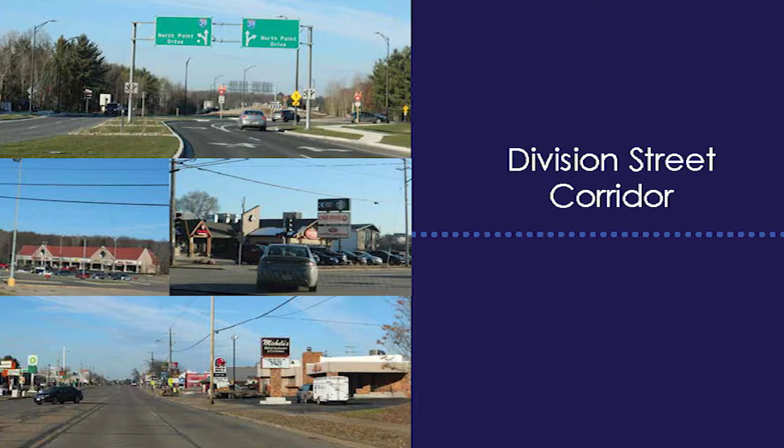So how do we bridge those big picture ideas and land them on Division Street? Well, first off, we listen. These are some of the comments that came out of the first public listening session, and that is: North Division Street should be where people are welcomed and come into the community.

It's a key gateway and it should supply opportunities for destination restaurants, hotels, housing, etc.

A lot of different people are looking for different things along this corridor. We heard many different proposals for specific uses, but the net effect is people are looking for different things in different formats, so we need to supply opportunities for those to occur within this corridor to be successful.

Biking and walking rose to the top in several comments as key aspects that are lacking in this corridor. Currently, we have a corridor that is very auto-oriented, moving traffic north-south very effectively, but it divides.

Division Street's a key name because it does divide east-west neighborhoods, the campus, the schools, Sentry, and other assets such as Schmeeckle Reserve from easy access to the community.

Big ideas -- again, these are comments we heard from the public input session -- include drawing the campus out onto Division. You'll see comments about that in some of the designs tonight. The idea that Division Street can be the front door for not just the community, but also the campus, is certainly not reflected in the format that's there today.

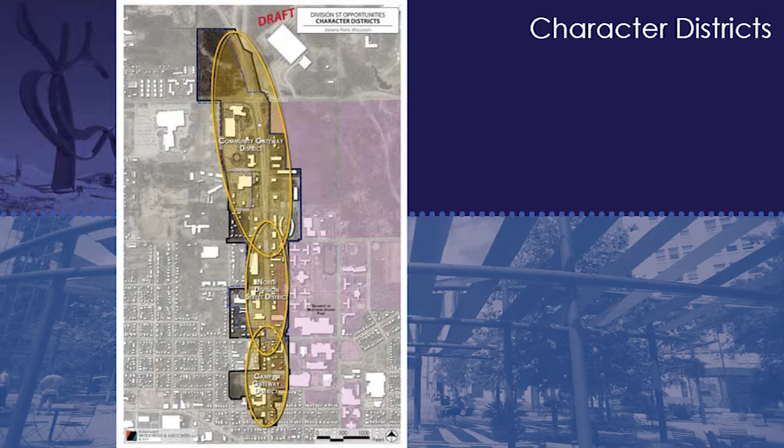Those three segments have led us to divide the corridor and make recommendations that respond to that, through the basis of the guiding principles of finding ways to diversify what Division Street is, opening up opportunities for additional housing and retail, while addressing vibrancy and community aspects that this gateway could be.

The first section is the community gateway, right as you get off the interstate and head to 4th. This corridor, as you reach the roundabout at North Point, is significantly different than it used to be. Think back to the days of the Holidome versus now the Sentry building flanking both sides of this intersection—it's a drastically different employment entry point than it used to be.

But as you continue south toward the existing development along this corridor before 4th, a lot hasn't changed. This is still largely an auto-oriented area, still a large cross-section, still dominated by large format uses. And honestly, some of that is okay.

Because in every community there is demand for those kinds of uses—hotels, larger format commercial and retail. So how do we find ways to make those aesthetically functional and improve the functionality and circulation of this area?

As we step down into this area, we see large areas of underutilized land, or land that can be redeveloped, repositioned, and reinvested in—and that spans both sides.

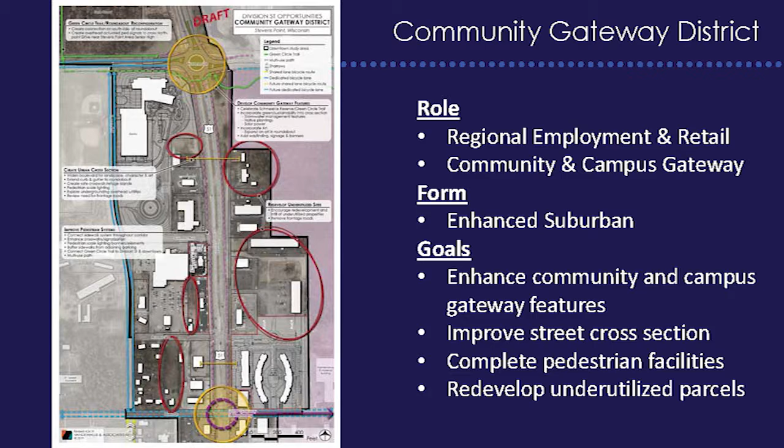But we also see assets that are beneficial. As I mentioned, Sentry, the presence of the Trig's grocery store, and some other commercial uses still form a functional piece of the community that needs a location. But we can certainly do better than a highway cross-section.

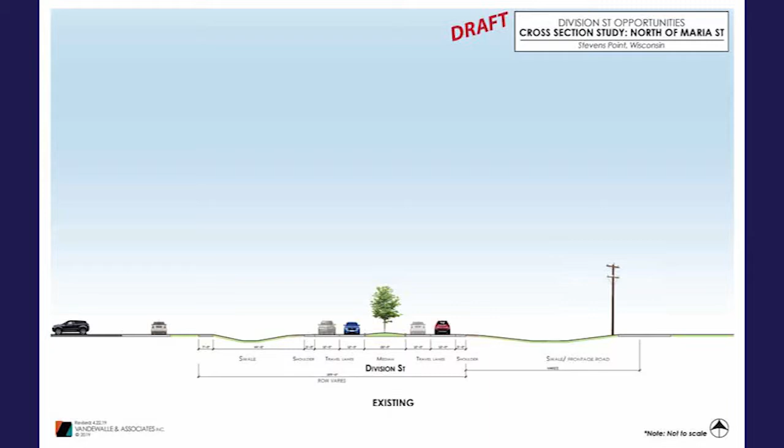In this corridor, our recommendation focuses on changing the feeling of having left one highway and gotten on another—rather, you've left a highway and entered a corridor that begins to approach the community.

This is not an area where we're recommending buildings come right up to the right-of-way or drastically change the environment the economy is supporting here. But we do recommend looking at this as an opportunity to recast this entry sequence.

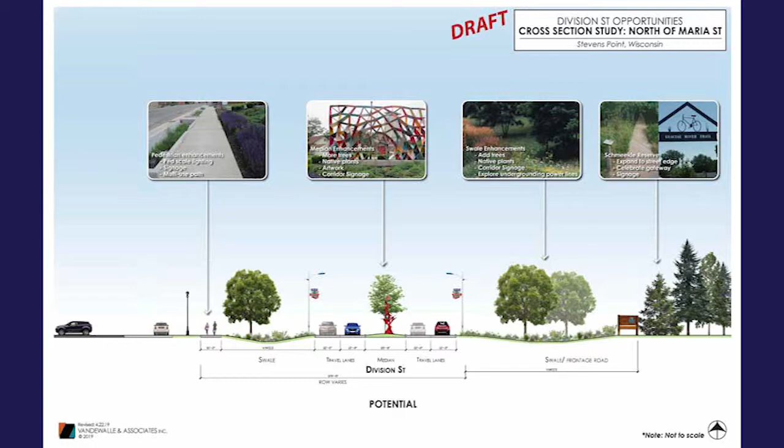As you come through this corridor, there are opportunities for art within new median landscapes, correcting the disjointed pedestrian environment by placing multi-use paths on the west and east sides, as well as enhancing community signage and gateway functions—so future development has a more aesthetic, connected, and functional approach than it does today.

This could take the form of renewed retail uses serving the region and beyond, or new employment uses like what's already begun with the Sentry improvements. But largely, we'd be looking at aesthetic improvements so we transition from that highway corridor and step down in travel speeds and character until we approach the next segment of this project.

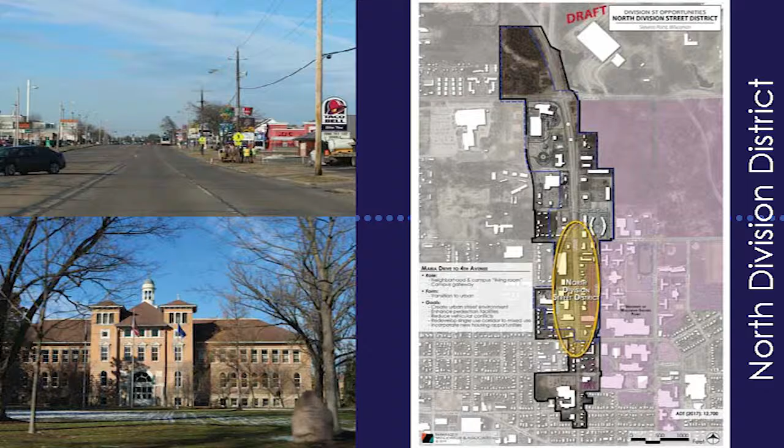As you approach Maria, significant changes to the corridor begin to occur. We've gone from areas largely underutilized and in need of reinvestment to areas with a lot of development, albeit in a very suburban format.

We've also transitioned from a very wide cross-section street to now a 4-lane plus turn lane—slightly more urban, but still incredibly suburban. This is a use that serves the region, but to a large extent, the economy has begun to pass it by.

The age of Amazon is changing the retail components of retailers throughout the country. What you see is a format designed for large amounts of traffic, when this was the only north-south way through town. We no longer have that.

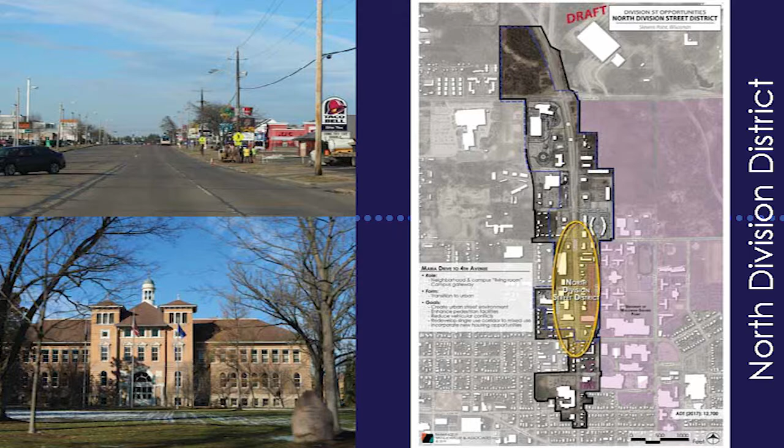The highway has long bypassed this corridor, and this is an opportunity area to really create a new living room for the campus and for the neighborhood to the west, by bridging the divide in several different ways.

First is a recommendation to transition this from a suburban format to a more mixed-use urban format. Simply put, over time—and this will take time—transition from buildings behind parking lots to buildings that front out to the street with parking lots behind.

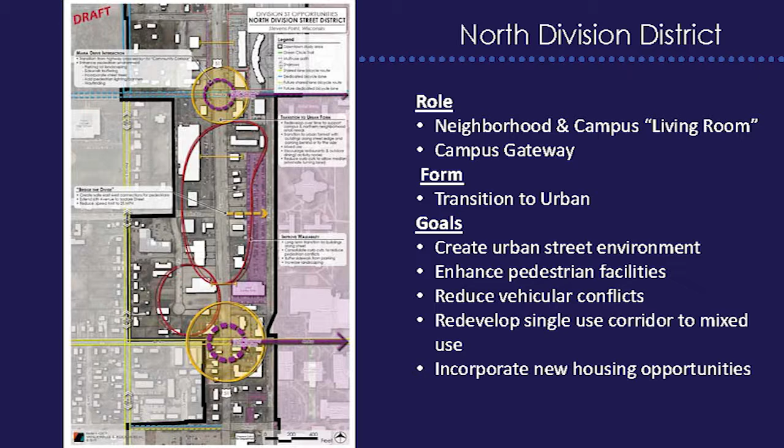Transition from single-use one-story buildings to mixed-use vertical buildings, incorporating opportunities for additional employment, additional housing, and additional retail that is of a community scale. This will be very different in the future from what is today dominated by cars, but really will focus on

opportunities to knit back the community on both sides of Division Street, make crossing east-west possible again, slow down the traffic, and create activity zones and nodes throughout the corridor. Looking at the cross-section, we have largely a suburban format. The challenge is, how do we get there? This is certainly a corridor that's going to have to adapt over time, and the first stage would be to look at the aesthetics within the curb.

So taking this and retaining the 4-lane cross-section, but instead of the turn lane, looking to incorporate a center median. Further breaking down the scale of this corridor to create a transitional corridor from 4th to Maria that will begin to slow traffic down and acknowledge that you've entered into the city.

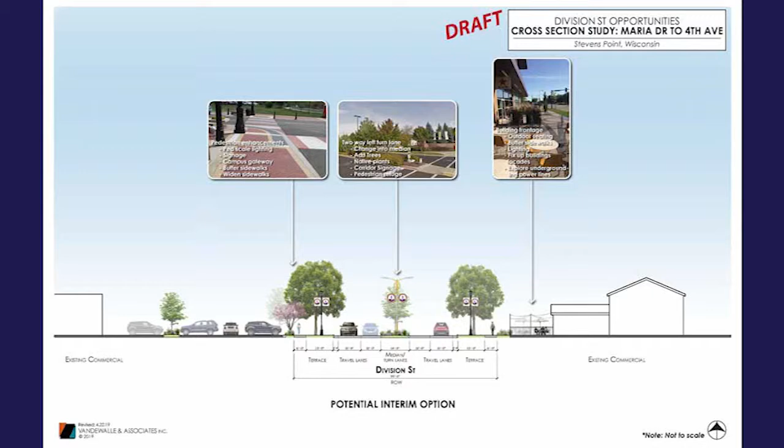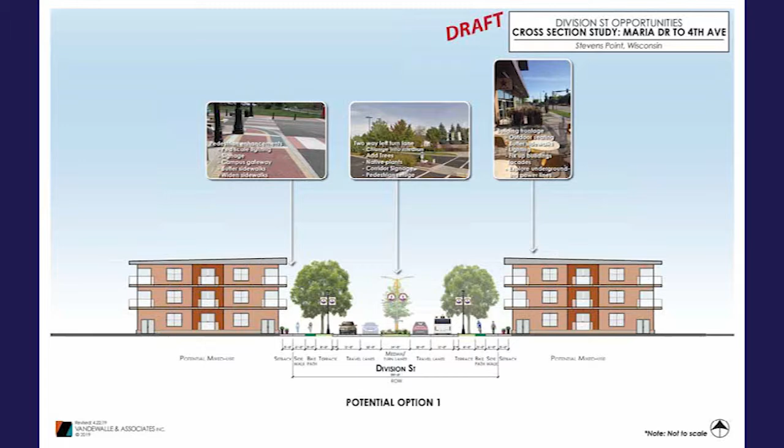In the future, as the parcels alongside it develop, it again begins to transition from auto-oriented uses to mixed-use urban uses. We begin to see buildings that come closer up to the street, and it gives us opportunities to then move the revitalization of Division Street from the curb all the way out to the right-of-way, looking at opportunities to incorporate additional pedestrian facilities, landscaping, signage, and gathering points so that this street transitions from solely serving vehicle movement to an environment where walking north-south along the corridor could be a pleasant experience.

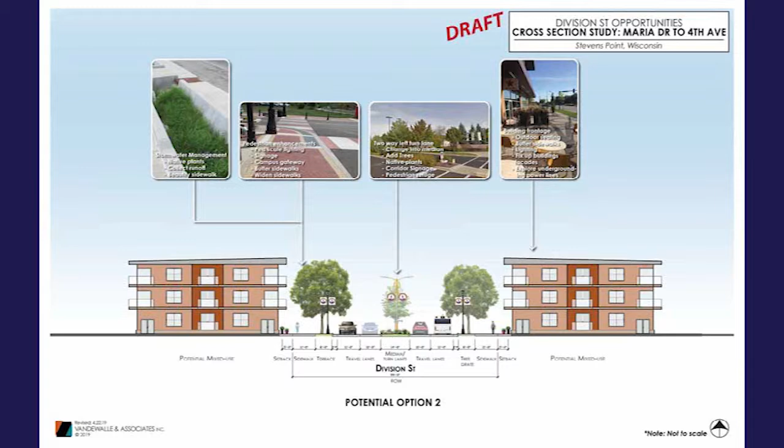This could have different forms. You could have urban cross sections, you could have grass, you could have bike paths off streets, and you could have sidewalks. It really comes down to the need to look at the format of the adjoining properties, the format of the adjoining uses, and reformat them into a more urban environment, such that pictures such as this are possible on corridors that used to look a lot like Division Street.

You can have buildings in 2- and 3-story scale that create space where people would want to gather. You can even work with Starbucks and other retail tenants to adapt what they're doing to fit within mixed-use buildings and create opportunities along this corridor.

Then we begin the transition point from 4th to the south. Here we begin to significantly change the scale and characteristics of this street from one that's serving the campus and the community to the community itself. As we begin to go south from 4th, we're looking at opportunities to enhance the environment while putting this cross-section on a road diet.

Effectively, the 4-lane travel pattern here could be transitioned to a 2-lane with turn lanes to accommodate opportunities for additional pedestrian environments and enhancements that would support the adjoining properties. Right now, this is a corridor that if you walk down the sidewalk, you're roughly 6 inches to 2 feet off the curb and off the travel lane, which is not a very inviting environment for pedestrians, and it's even harder to live along it.

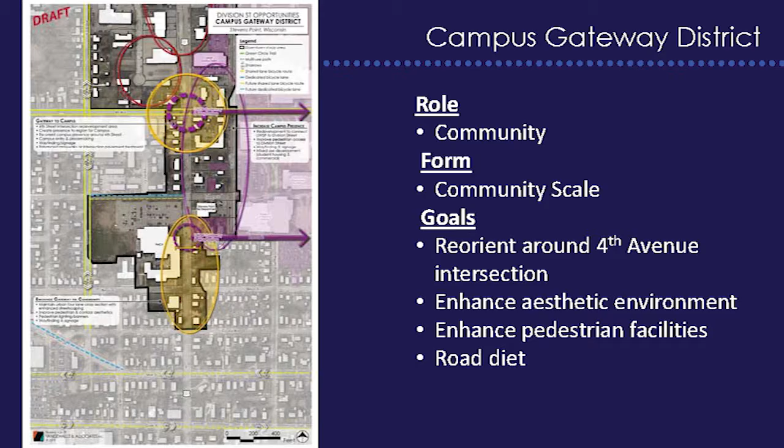By looking at this cross-section and reducing the number of travel lanes, at the same time as we invite the campus to come out to Division Street, and we create sidewalks that buffer the traffic movements so pedestrians can begin to move north-south, we can move from largely moving cars in a very tight right-of-way to something that could still accommodate the vehicular movements and could still create the aesthetics that the community is looking for in terms of transitioning from a retail environment to a neighborhood environment.

Now, this cross-section would not be the only cross-section. Certainly, it would have to adapt. You'd have areas where you may be able to incorporate islands. You may have areas where you'd have to have turn lanes. As you approach Clark and Main, the number of lanes could flex in and out as well. So this transitions across the whole corridor, and by no means is this intended to be the cross-section for the entire stretch all the way down to Plover, because it will have to adapt. Just like we've adapted across this corridor study, we would need to adapt in response to the adjoining land use.

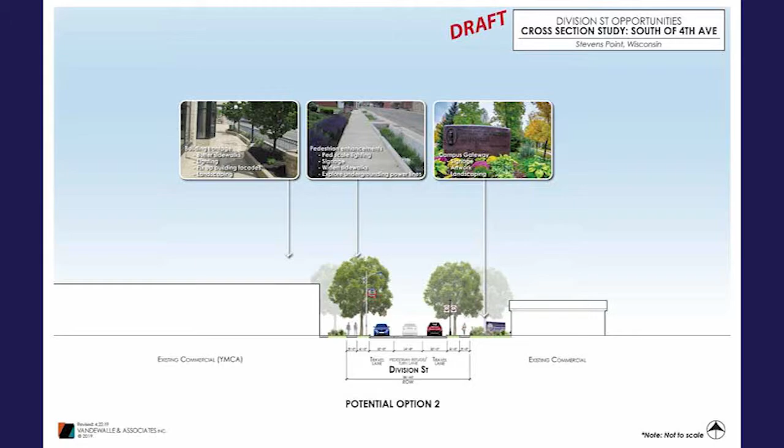The net goal here is to slow traffic and signal that you've entered the heart of the community, and that it should respond to the land use, not the need to push as many cars through as fast as possible.

One of the other aspects this area seeks to do is to celebrate the fact that we have a great institution with a campus. If you were to approach campus from Main Street, the feel of the environment is entirely different than if you entered from Division Street. Right now, you can go right past campus, and if you didn't know, you might not even notice it.

This is looking down 4th Avenue towards campus, with a new building on the left and perhaps the existing buildings on the right. The idea is that we want to open up and embrace campus out to Division Street, because it can be a front door for campus just as this is a front door to the community.

But we need to look at how the buildings relate to the street, how the street is designed, and we need to really help create that opportunity to have activities that speak to the people who live here, not just the people who drive through this corridor.

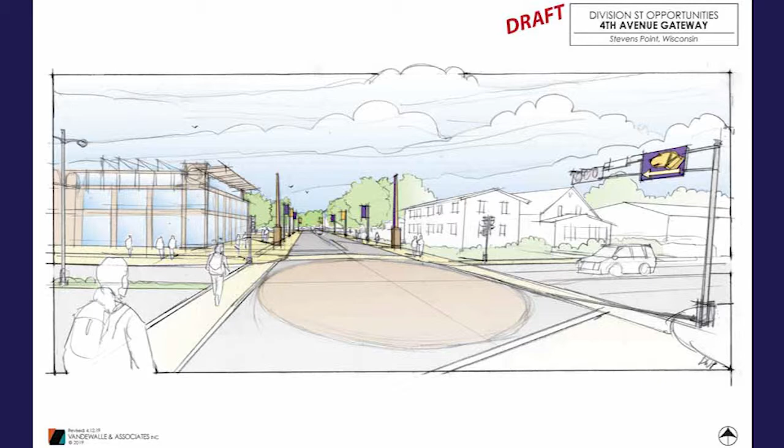In the future, that could be expanded south and north. But we really see the node at 4th as an opportunity to begin this process, to help recraft and redirect Division Street away from auto-only and into a much more mixed-use corridor.

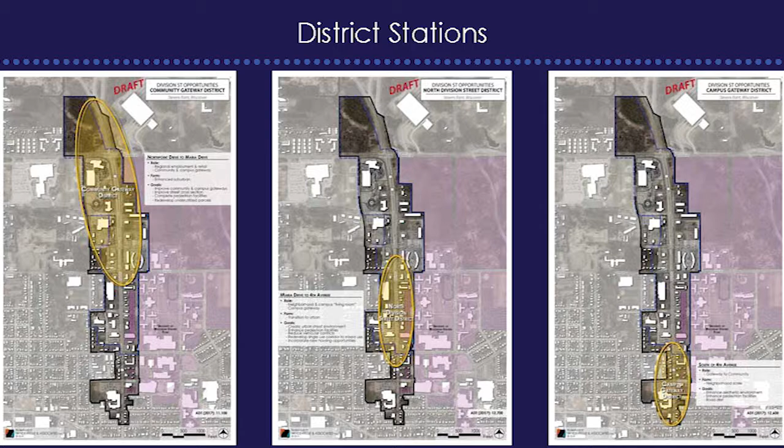We appreciate you taking your time tonight and want to thank you again for helping as we begin to look at what the future holds for Division Street, because it's not just a corridor. It's part of the community, and it's part of how people experience the community. It can be an asset that helps diversify what the campus has, what the neighborhoods have, and repositions the community for future growth. So thank you, and please feel free to ask us any questions as we move around the room.